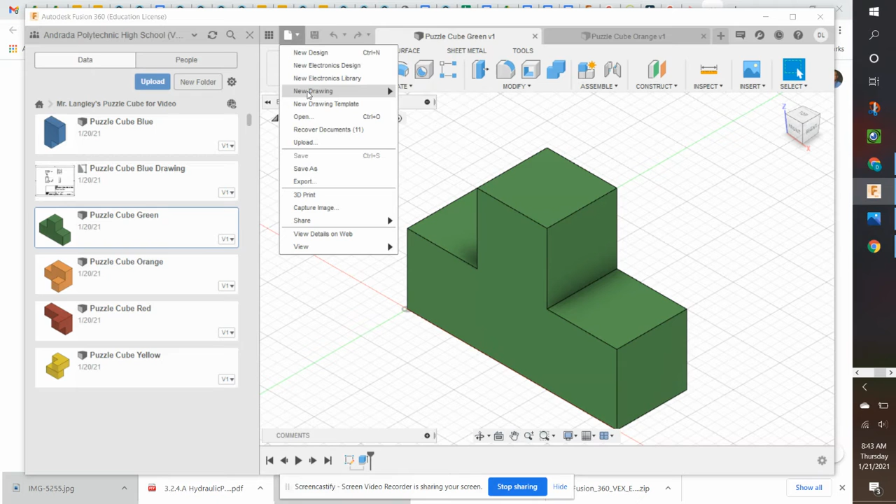Once I have my piece open, I can just go on the file dropdown and do new drawing from design. Then I like to change my sheet size to the second one, 11 inches by 8.5 inches. Leave everything else, click OK, make sure it's in inches, and it should open up this drawing sheet.

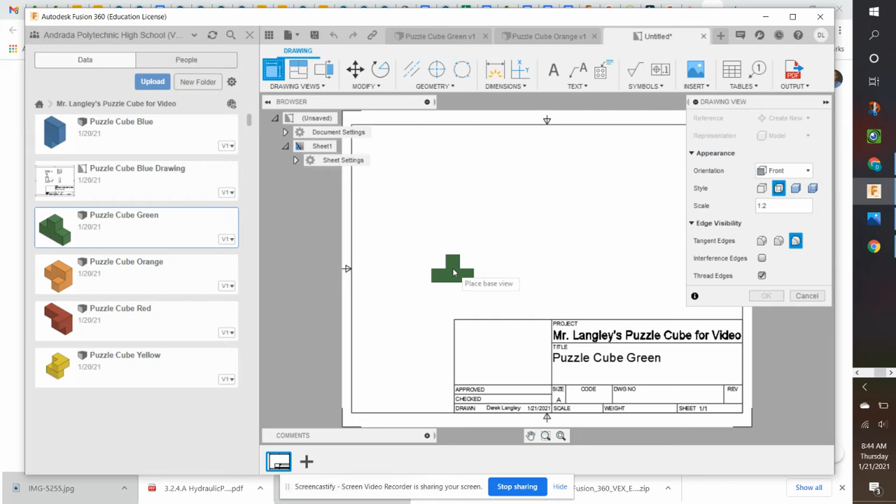So the next thing we're going to do is place our base view, our front view, in the bottom left-hand corner. Then we're going to do our projected view, so the top, the ISO view, and our side view.

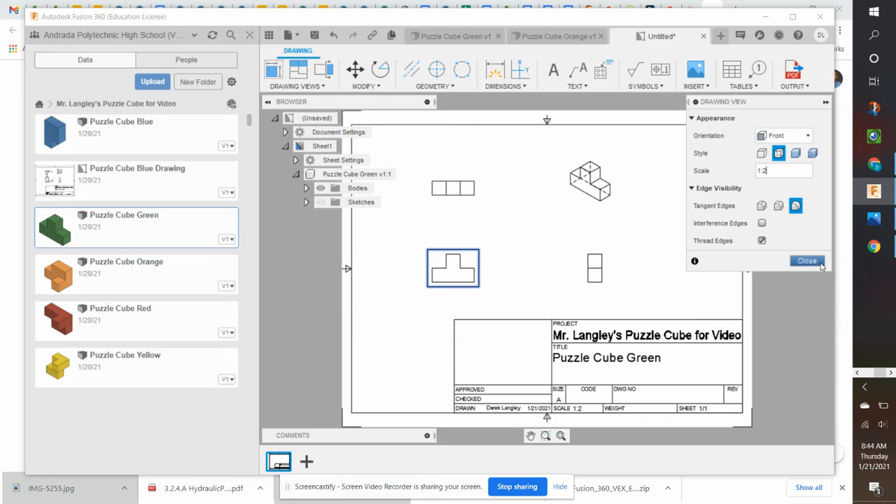If you want, you can make those bigger by changing the scale, and I'll show you how to do that in the next piece. Then you can right-click, click OK to get out of it. I guess you can just double click and it comes up again, and you can change the scale here, and it should change the scale for the... oh, it only changes for that one. Nope, it changes for all of them. 1 to 1 makes it bigger. I'm just going to leave it 1 to 2, the default.

You don't really have to modify this down here, the title block. You don't have to worry about that.

Now we're going to add dimensions. You can either use D on the keyboard or the buttons up here. And we're going to dimension our object, so I'm going to make sure that I have the dimensions I need.

Remember, we're putting them in between views. We're going to try to put as many dimensions on our front view as possible. And that's how we're going to do this.

There we go, so I have those. I can put this one here, this one here. I'm not going to do the entire distance across because it'll cross over with my other extension lines. And then I need the depth.

I think I'm good to go on this one. I think I have all the dimensions that I would need to recreate this and give it to another engineer so they could recreate this. Remember, you don't want to over dimension it. You want just to put enough dimensions where you could find the missing ones by using mathematics.

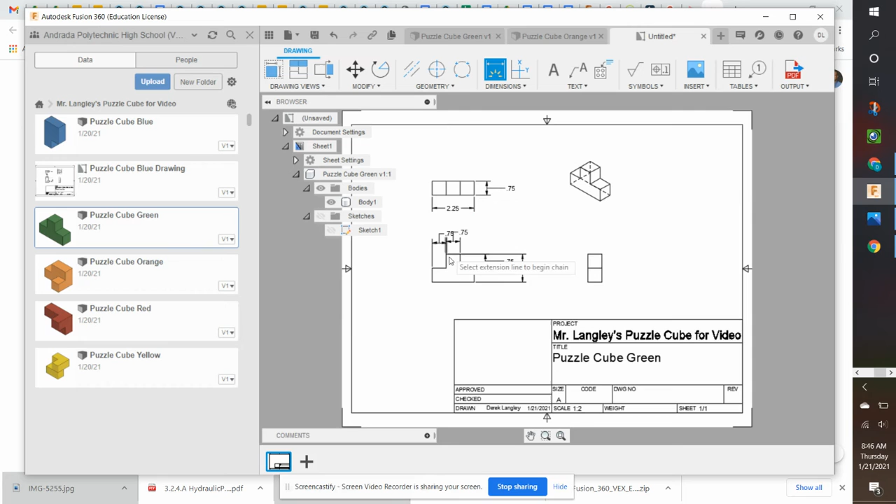So then when I'm done with this, I'm going to save it. It defaults to adding 'drawing' after the name, and then you're going to place it in whatever folder you want. I want it in this project folder, and it should show up on my left-hand side.

Now I just have to do the orange piece. I'm going to open up the orange piece.

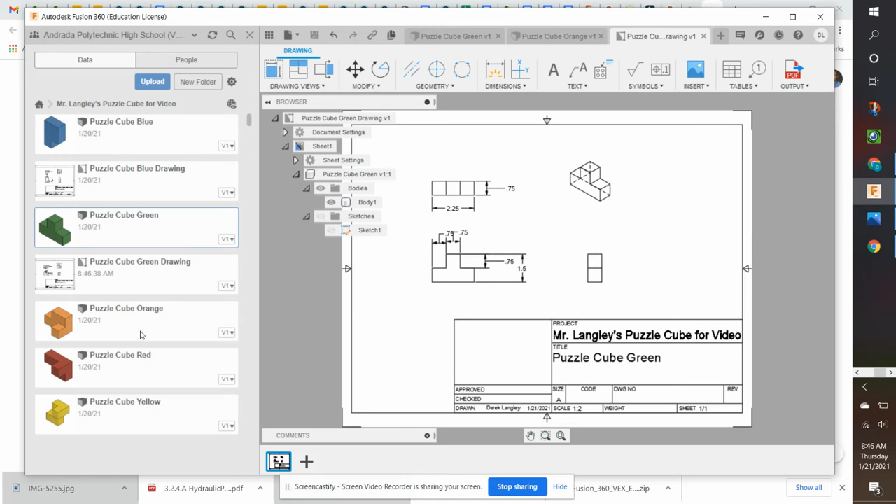We're going to do the same thing. We're going to go to the file, we're going to do new drawing from design. I'm going to change my sheet size to 11 by 8.5, click OK, and now I can put in my base view, which should be the front view.

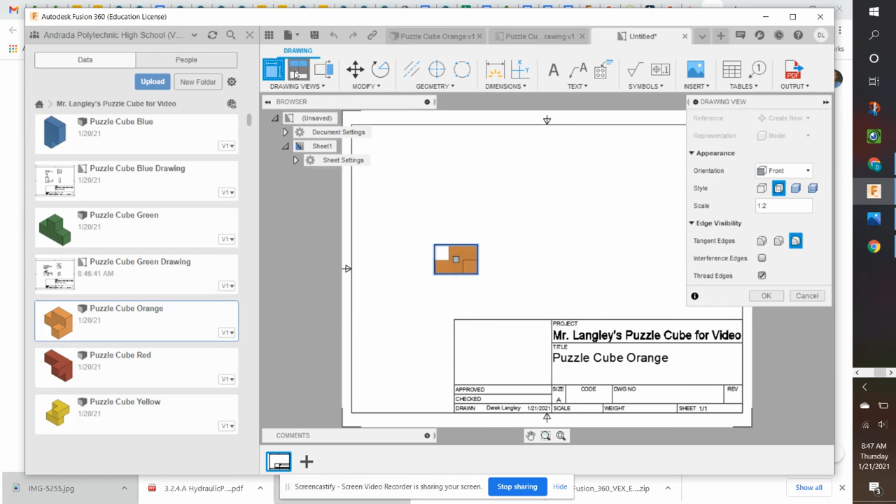If it's not, then you can change these around if you need to. I believe you can change the base view. Click OK, and now we can dimension our part.

I'm going to dimension. I'm going to put these dimensions on. I'm going to work smaller to the larger dimension so that I'm not crossing these over, smaller to larger.

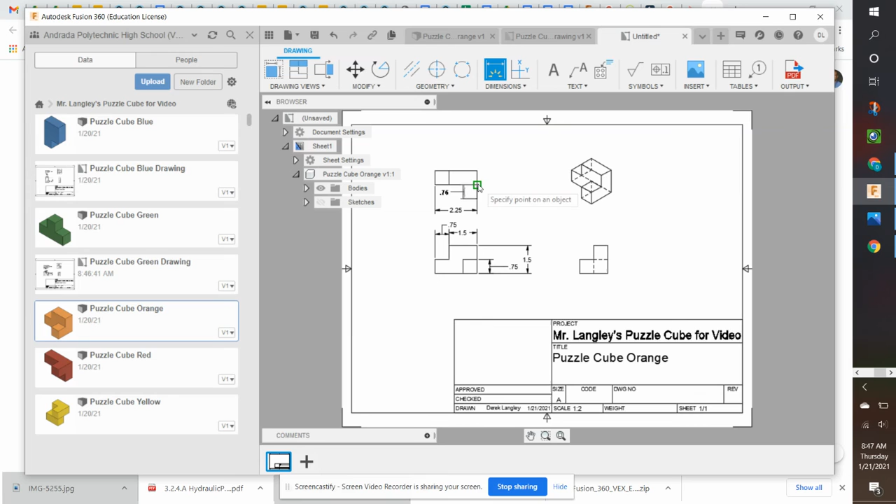I can put the entire dimension here. I can put my... whoops, I need to move that. There we go. If you want to move it, it looks like you click and then you can move it closer to the object or further away, as long as your dimension application or icon isn't activated.

I'm trying to see what other dimensions I need. I would have all my height dimensions, width dimensions, and depth dimensions needed to recreate this part, it looks like. So I should be good to go.

And then I can save it, just like the other one, and it should show up on my left-hand project folder.